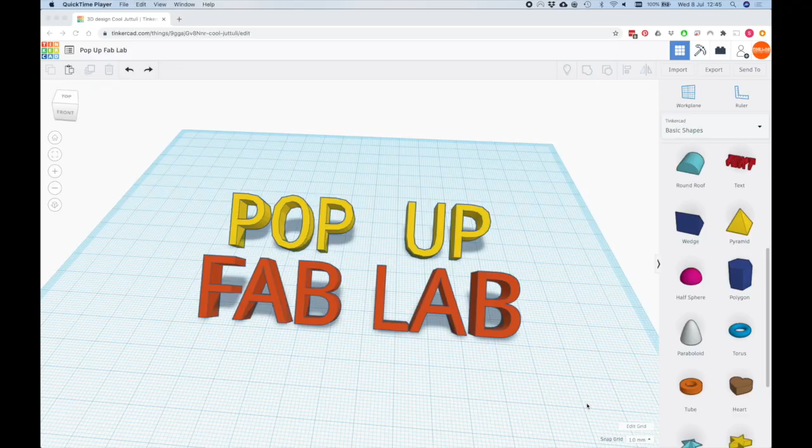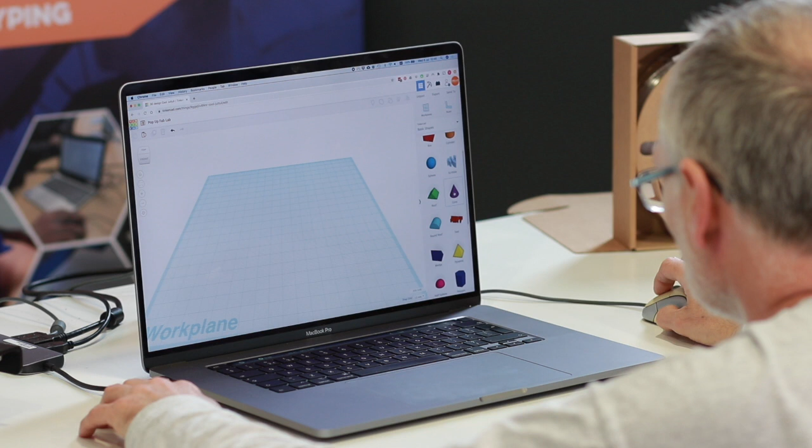I'm going to be using Tinkercad software and then using our Ultimaker 3D printer to print it out. Okay, let's get started. So here we are in Tinkercad. I'm just going to get rid of my pop-up Fab Lab logos. Today I'm going to design an egg cup. I'm going to start off with the base of my egg cup being a cone, and I need to make that bigger - 40 by 40 by 30.

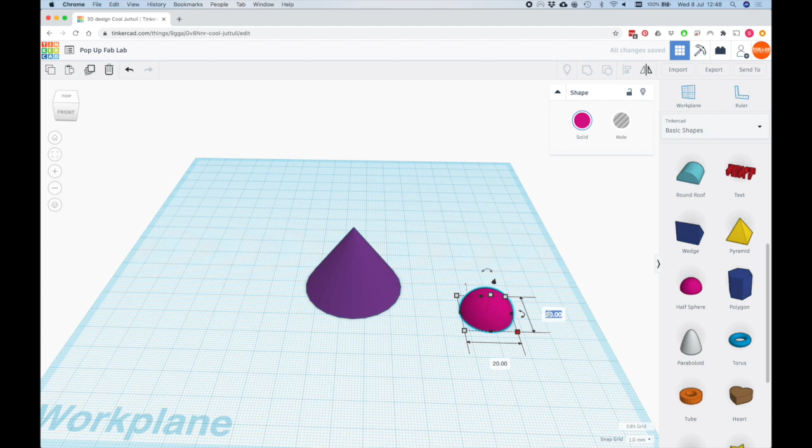For the cup of my egg cup, I'm going to use a half sphere, and again I need to make that bigger - 50 by 50 by 30. Now that's the wrong way around, I need to turn it upside down, so I'm just going to rotate that 180 degrees.

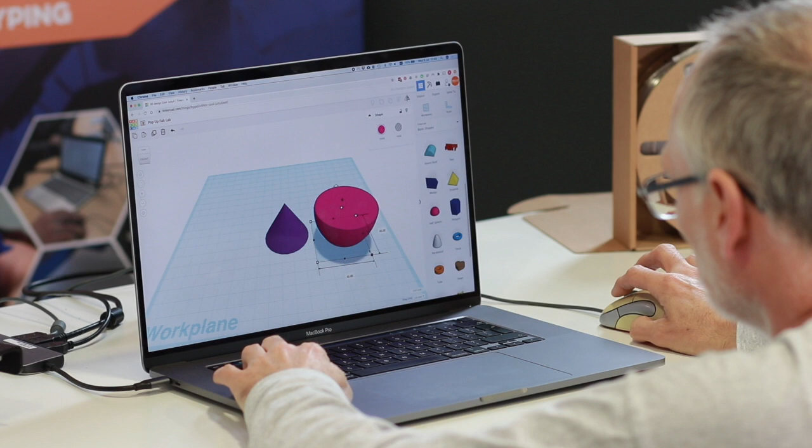So what I need is to make a hole in the sphere there to make a cup. What I can do is duplicate that and scale it down. I'm going to use the Control and Shift keys to scale down, so I'm going to scale it to 45. Now I have a smaller half sphere kind of hidden inside that one.

What I'm going to do is align them together - align it to the top and to the middle of each side. Now I need to cut a hole in this. If I make this into a hole, but I'm not going to group them just yet.

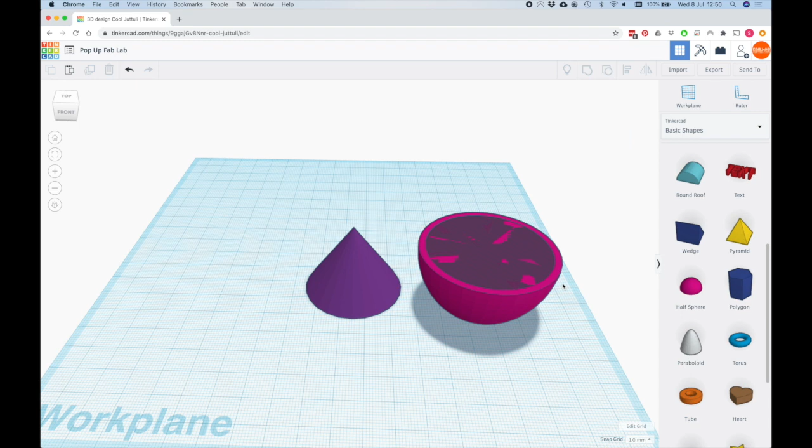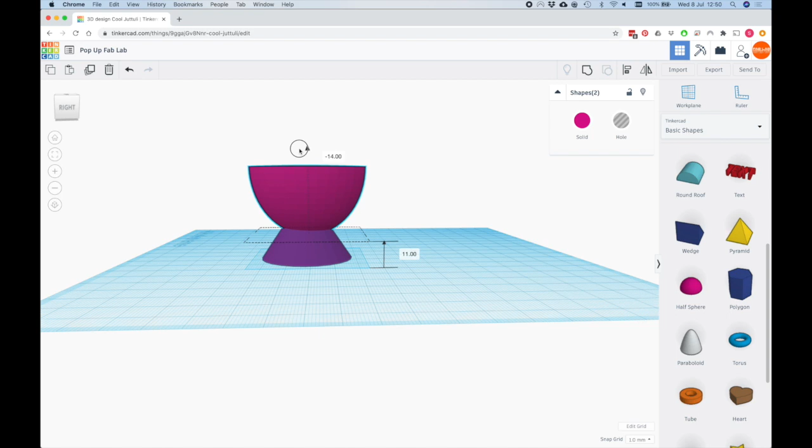What I'm going to do is move them both up in the air so that they're sitting on top of my cone. Let's turn around to the side and see. I might need to move it down a little bit more, just to make it a bit more of a squished egg cup.

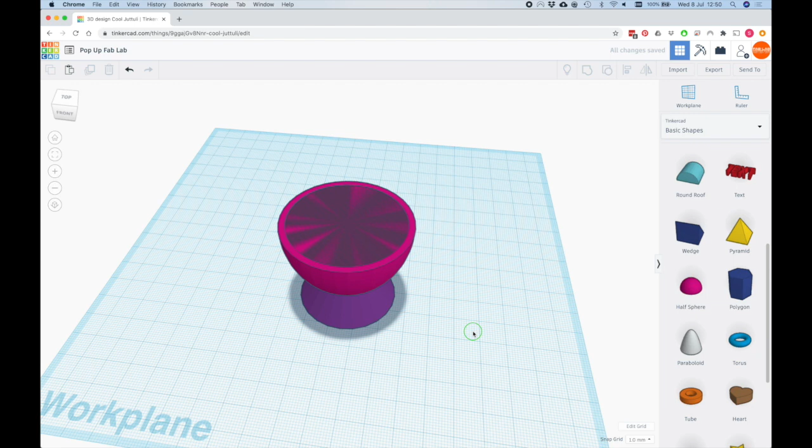Again, what I want to do is align all of these together - align the bottom so that lines up, so that's nice and aligned. Okay, so what I want to do now is just group all of those together, and it will cut the hole out for my egg cup.

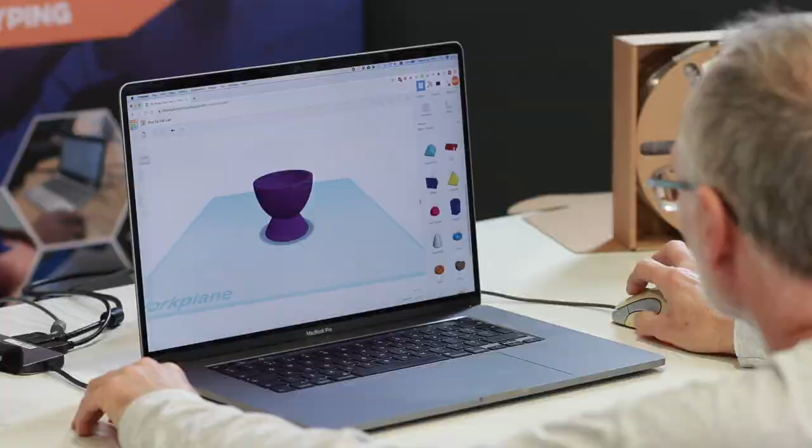And there we have a nice little egg cup design ready to go. So in Tinkercad, I'm going to export this as an STL file. STL files are the standard files that we use for 3D printing.

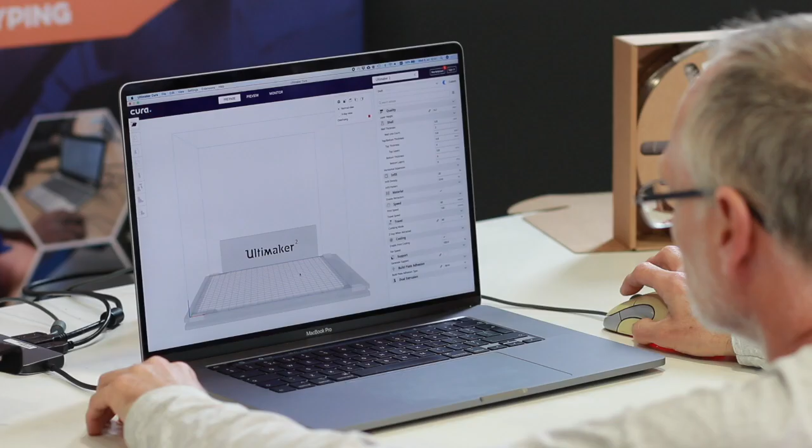So it downloads the STL file to my computer. What I want to do now is convert it into a file that the 3D printer is going to understand. So this program here is called a slicer.

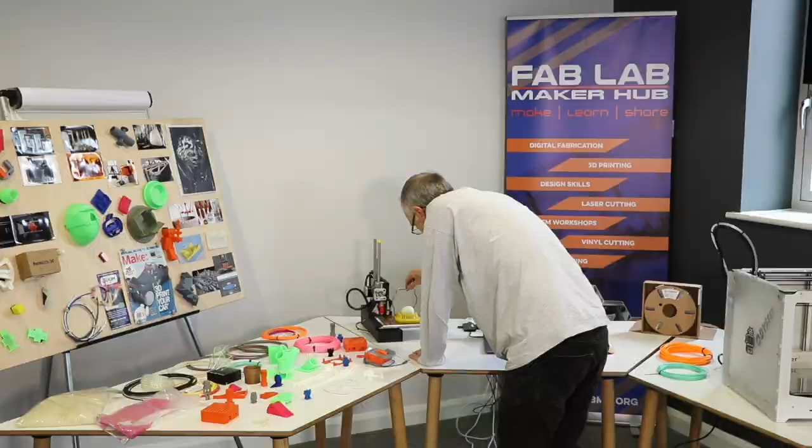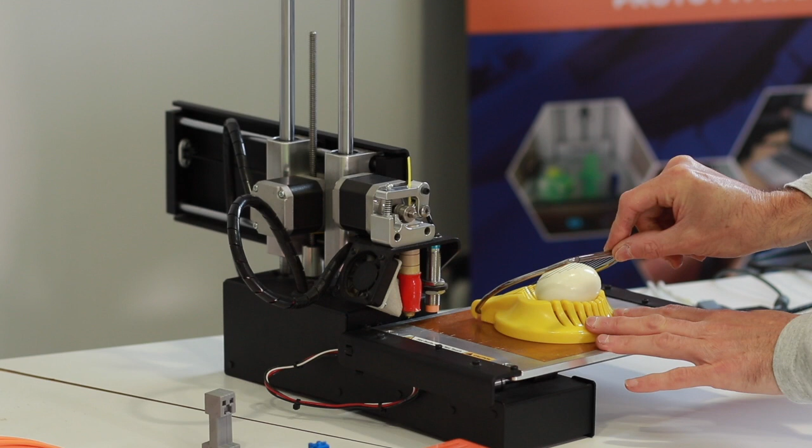Now I'm going to give you a practical demonstration of what a slicer does. So here I have an egg, and this is my favorite kitchen gadget, the egg slicer. Essentially what we're going to be doing is bringing our 3D model into this software. It's going to do to the 3D model what I'm going to do to this egg, which is essentially slice it up into small sections like that.

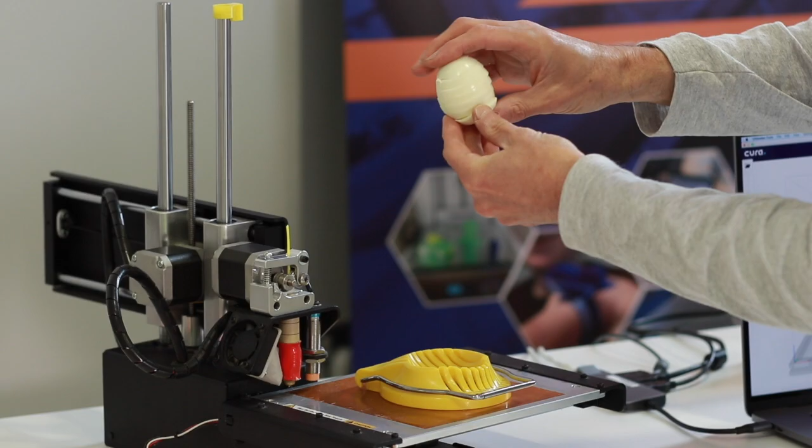And then the 3D printer will come along and build it up layer by layer by layer by layer until we have our complete model whole like that.

So let's do some digital slicing with our slicing program. I'm going to import my egg cup model. There it is - there's my egg cup model.

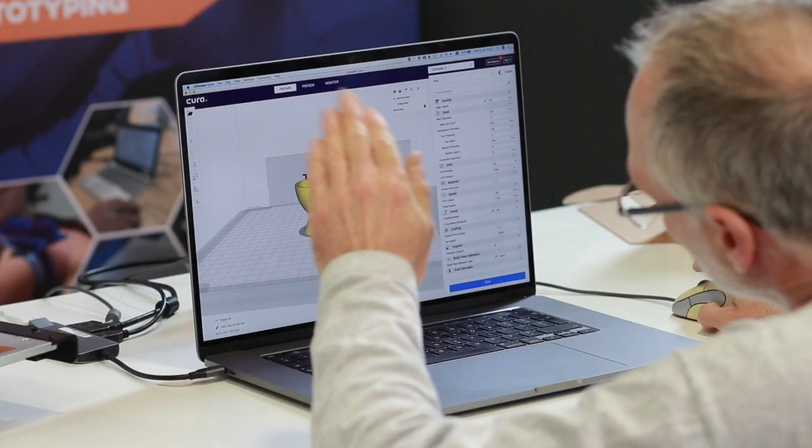The red indicates that there is too much of an overhang. Essentially what that means is it's going to be printing in kind of thin air, and obviously you can't print in thin air. There isn't too much of an overhang there, so it probably will turn out okay, but it might mean that we'll end up with a bit of a rough surface on this section.

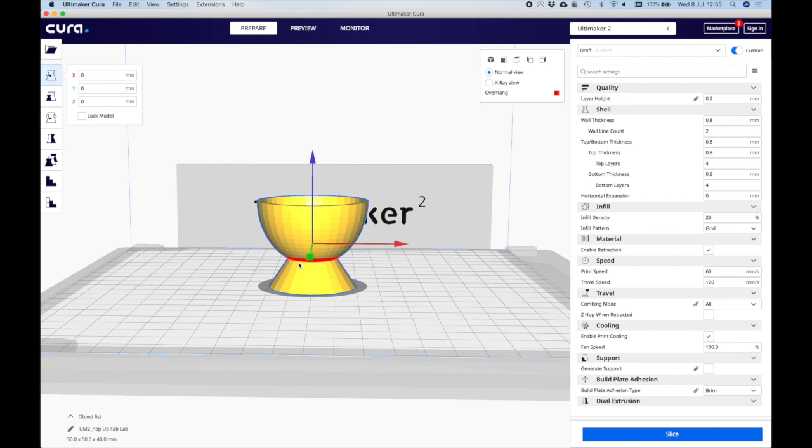Now, if we wanted to, we could go back into Tinkercad and maybe make that base a little bit wider, or just change the angle to compensate for that. But for the moment, I think I'm just going to leave it as it is - it should print out okay. Now over on the right hand side here, we have some settings.

The main setting in terms of quality is what we call the layer height. At the moment, our layer height is set to 0.2 of a millimeter. Each layer in this model, just like the layers of our egg here, have a certain width to them. The layers on our digital model will also have a width of 0.2 of a millimeter.

Obviously, the finer the layer height, the greater the quality. On the Ultimaker, we can go up to 0.05 of a millimeter and get a very fine layer height. The trade-off though is in terms of the time it takes to print. Something like that will print very slowly, so I'm going to go back to 0.2.

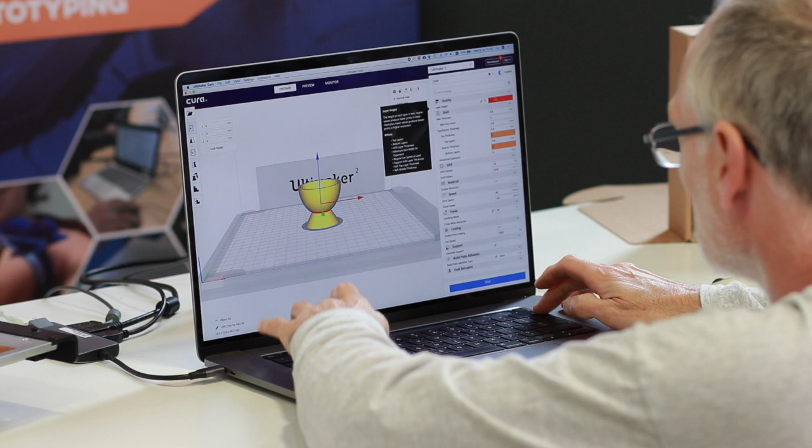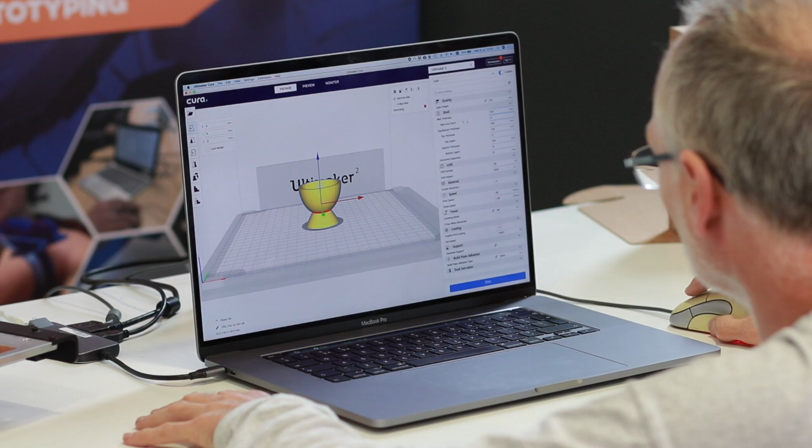The next thing is the thickness of the shell. 3D prints don't usually print completely solid, and equally they don't print completely hollow. You want to set what's called an infill, and between the infill and the wall thickness determines how strong your model will be. At the moment our wall thickness is 0.8 of a millimeter. If we wanted a stronger shell, we could change that to maybe 1 millimeter. Again, that will increase the time it takes.

The next setting we need to look at is what's called the infill. As I was saying, you don't typically print models completely hollow or completely solid, so the infill lets you set a percentage. So 20% means that it's 20% filled with a grid pattern.

The next thing we need to look at is how it's actually adhered to the plate. There are a couple of options here. We can print a brim, which basically prints a little flat surface for the model to stick to. The other option is we can print a raft, which is a big, thicker platform that the model sticks on. The other option is what's called a skirt, which essentially is just a perimeter around our model. Now, to save time, I'm going to print a skirt.

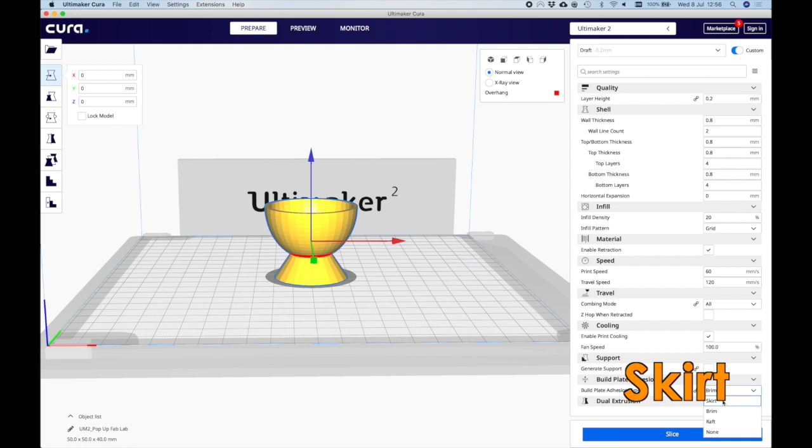Once I have all these settings set, I'm going to hit the slice button, and it goes through and works out how long it's going to take to print that model. It's telling us at the moment it's going to take 1 hour and 4 minutes to print our model. To speed it up, we could set a bigger layer height. If we go to 0.3 of a mil and slice it, we see it only takes 45 minutes.

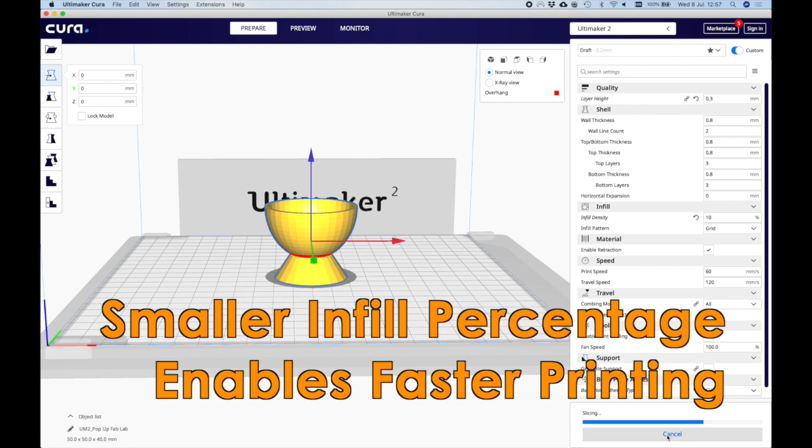So if you're just prototyping something, just to get an idea of how something looks, you can change the layer height there. The model won't look as high quality, but you'll get a much better idea of what it looks like. We can also change the infill as well, maybe to 10%. We'll slice that again, now it's down to 39 minutes. Again, for a model like this, where we just want to get a quick rough prototype out, that's probably okay.

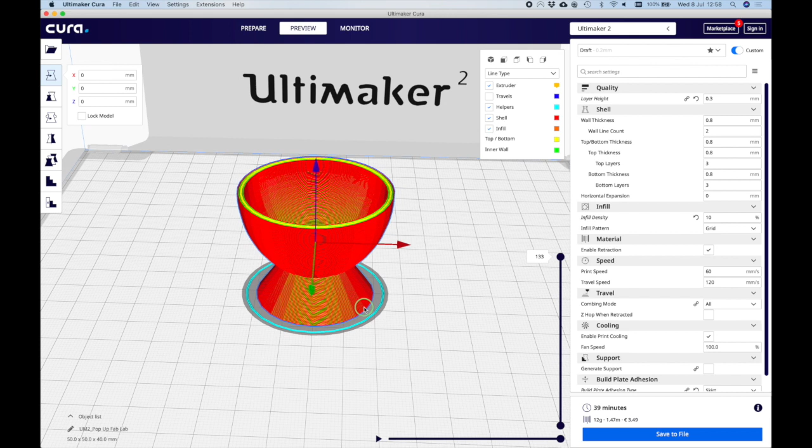I'm going to save this onto our little memory card here, eject it. One thing I want to do first though is just have a quick preview on the screen of how it's going to print. I can zoom in here and have a look at my model, and look at the layers. I can see my 10% infill there, the crisscross pattern - that's okay for this type of model. And then as we come up, we can see the walls on the inside getting constructed.

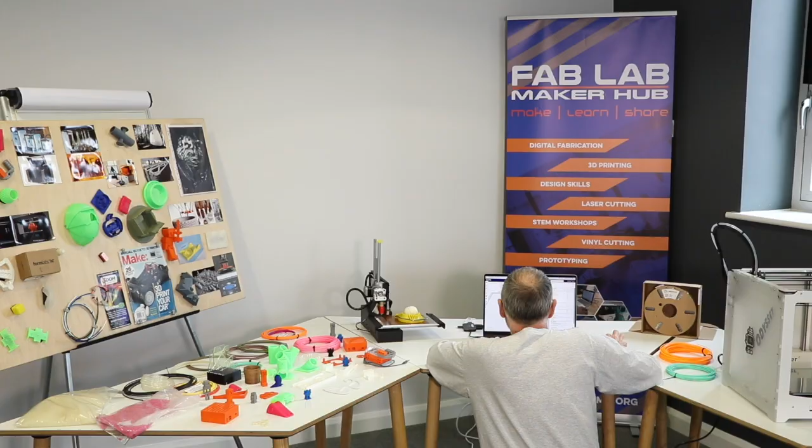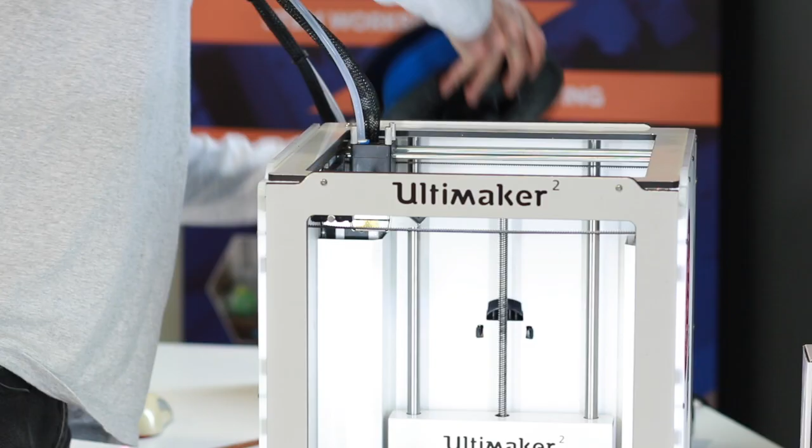So now that we've got that, I can take my memory card, put the card in, turn the printer on, and the printer warms up. First thing we're going to need to do is load some filament into the printer. I don't have any filament in there at the moment, so I have a roll of blue PLA filament here that I'm going to put in.

So I'll put it on the back. One thing I need to do is tell it that I need to change the material, so I hit material and change. And what happens is the hot end moves to the front there and it starts heating up the nozzle.

We can't load the filament until the nozzle is up to the right temperature. Once that's heated up, it'll first try to eject any filament that's in there. There isn't any at the moment, but it'll try to do that anyway. Once it's done that, we can load our filament in.

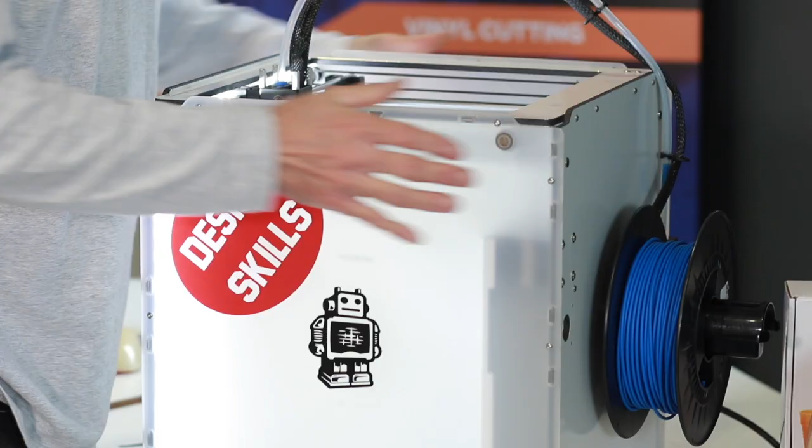I'll turn the machine around so you can see me loading the filament in. So that's the extruder on the back there, and there's a little toothed gear inside the extruder that turns around, with a hole there for you to insert the material.

So there you go, it's now up to the right temperature, and it's ejecting whatever material was in there before. Now I just have to go ready, and now I can insert our filament in here. I just wait till the toothed gear grabs hold of it. That's good.

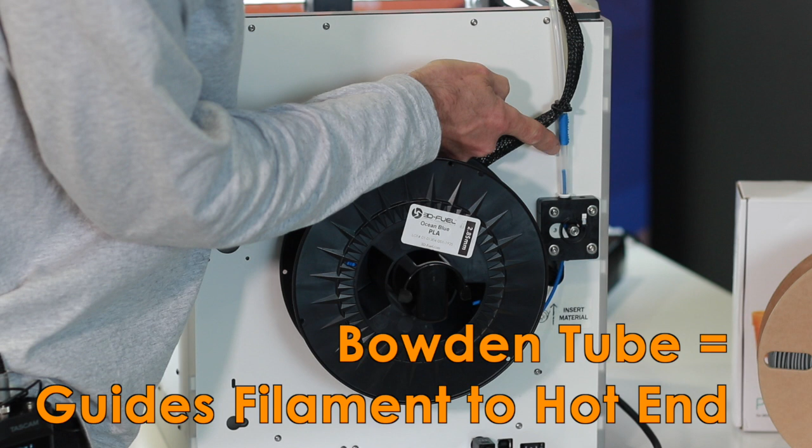As you can see, it's now coming up the Bowden tube here - this tube is called a Bowden tube. Once it reaches the little mark there, we can hit the button on the front and get it to push it further up the tube. So there we go, it's now going all the way up to the top.

I'm going to turn that back around again so we can see what's happening. It's now pushing the filament down into the hot end, starting to melt the plastic, and we should see it coming out of the nozzle in a few seconds. There we go, now we can see the blue filament coming out, so we can click OK, we're ready to go.

So if we go back to our settings here, we just need to find the file that we had. There's our pop-up Fab Lab file. Hit go. So what's going to happen now is it's going to heat up the element inside the hot end and heat up the nozzle.

The other thing it's also going to do is heat up the print bed too. So the print bed will heat up to around 60 degrees and the hot end will heat up to about 210 degrees. Once both of these are up to temperature, it will begin printing for us.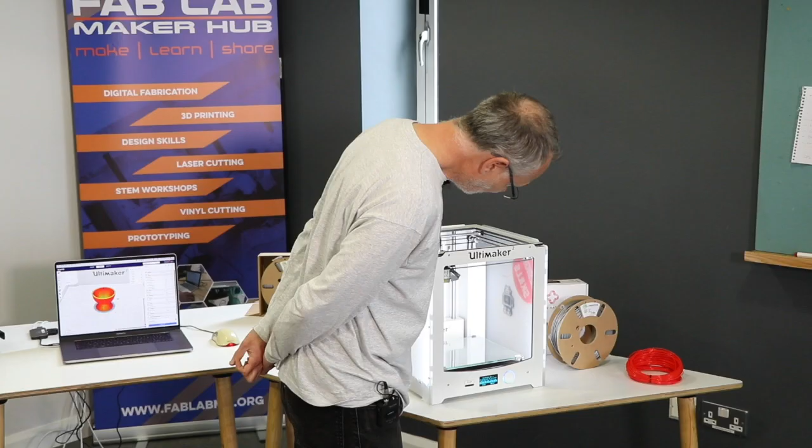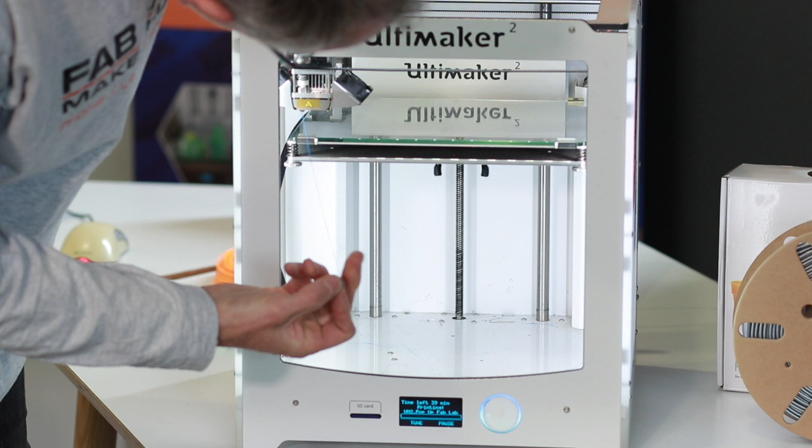So what's going to happen now is the print bed will raise up and it'll start extruding a little bit of spare plastic. So there we go, it's now going to extrude some plastic here, just to prime the nozzle.

And it's going to go over and then start printing our first layer. So it prints the skirt first, the skirt layer that we selected, and then it will start printing the first layer.

Now it's important to just monitor the first layer to make sure that it's really sticking well, that we're getting nice even coverage of the plastic on the first layer. We're getting a nice first layer coming down there. The plastic is nice and evenly spread, with no holes or gaps in it.

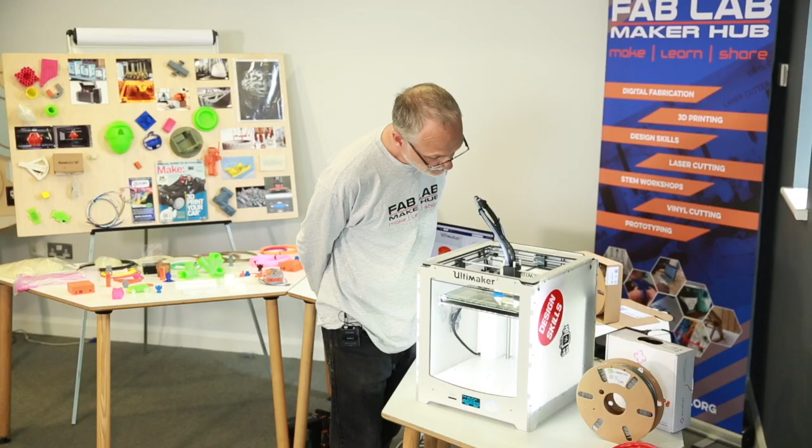And you can hear the fans kicking in now. So your first layer is always printed with the fans turned off, and then the subsequent layers are printed with the fans turned on, so that the plastic solidifies enough for the next layer to be printed.

Okay, so that's going to take roughly, it says 50 minutes, but I'd say it'll print quicker than that. So we'll come back and see how it prints in the end.

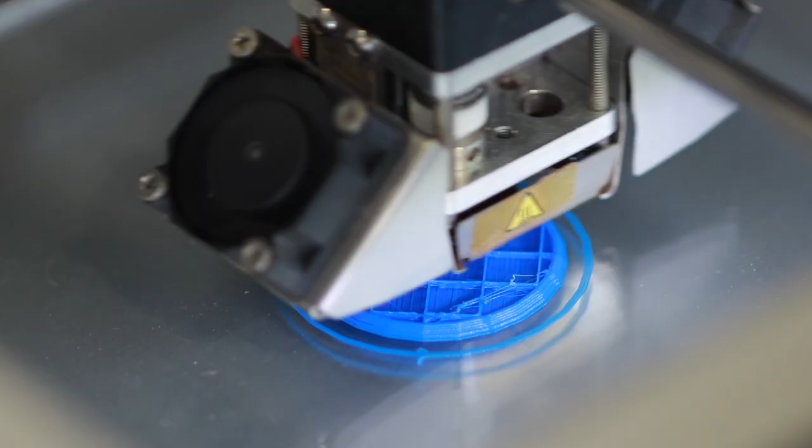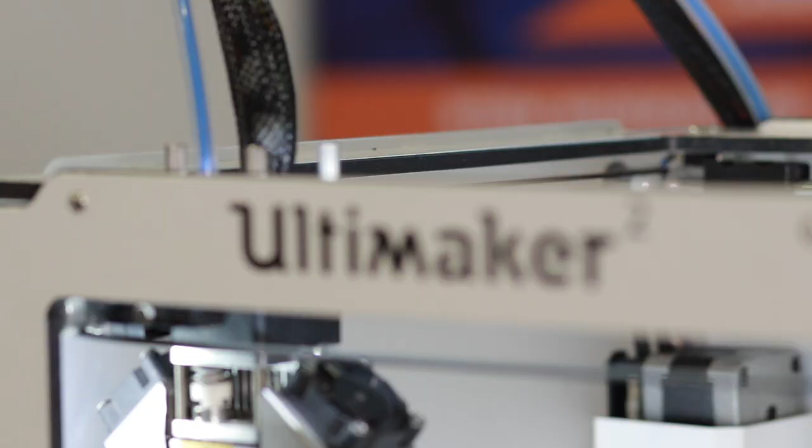Well, that took roughly 40 minutes to print. The print is now finished. The bed's lowered down, the head has homed back to its position in the corner there, so that's quite cool to the touch. Now I should be able to just lift the print straight off the bed very easily, just like that.

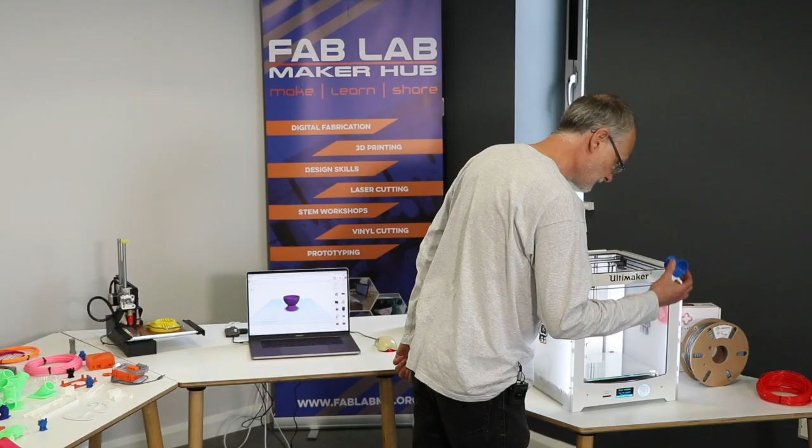So there we go, there's our finished print. As I was saying, we get a little bit of what we call stringing here, which is where it was trying to print.

Remember we saw on Cura that it was in red, which demonstrated that it was going to have a tough time printing those because there's too much of an overhang. And it is true, there is too much of an overhang, so we have a few stray filament threads hanging down there. The actual overall egg cup is a good shape, nice and solid there.

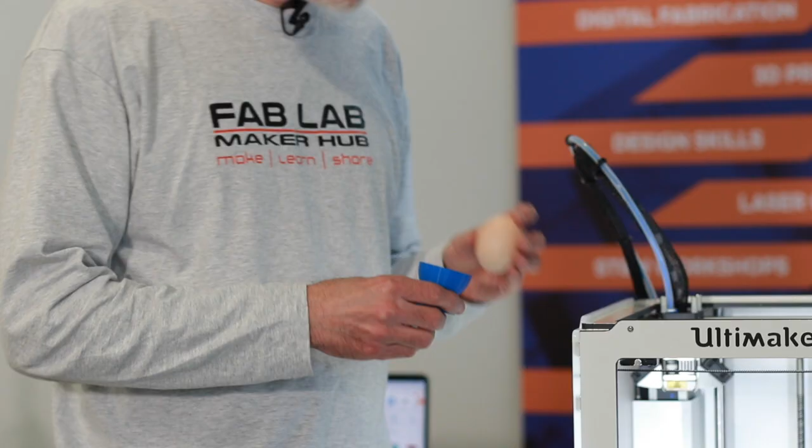It feels quite sturdy to touch. So all that's left for me to do now is to test it out. I can grab my egg, put it in the cup - fits perfectly. So all I can say is have a cracking time 3D printing.